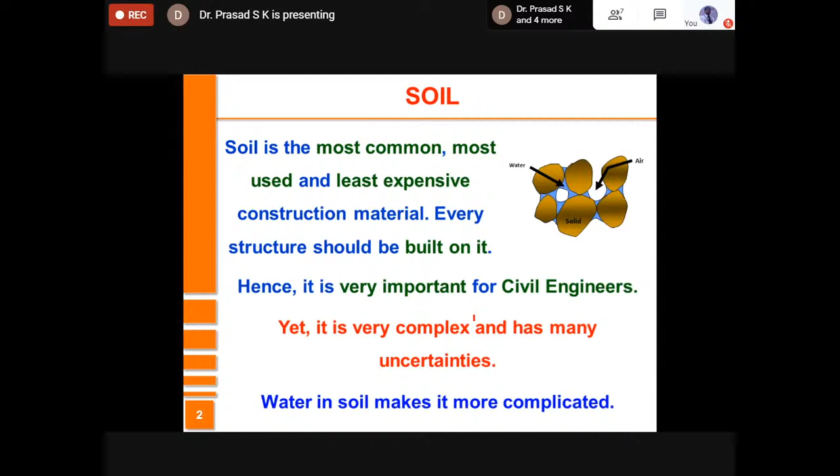Peculiarly, soil is not easy to handle. It has different properties at different places, and at the same place also its properties are very different at different times under different situations. So I always say it is a very complex construction material and hence poses a lot of uncertainties. In fact, the presence of water in soil makes it very, very complicated. Considering these complexities, there needs to be some standards, because due to the variations, things can go wrong if we are not considering things properly. Hence, Indian standards will have to play an important role. Unfortunately, I feel in geotechnical engineering it is not followed to a full extent, though we have many, many codes.

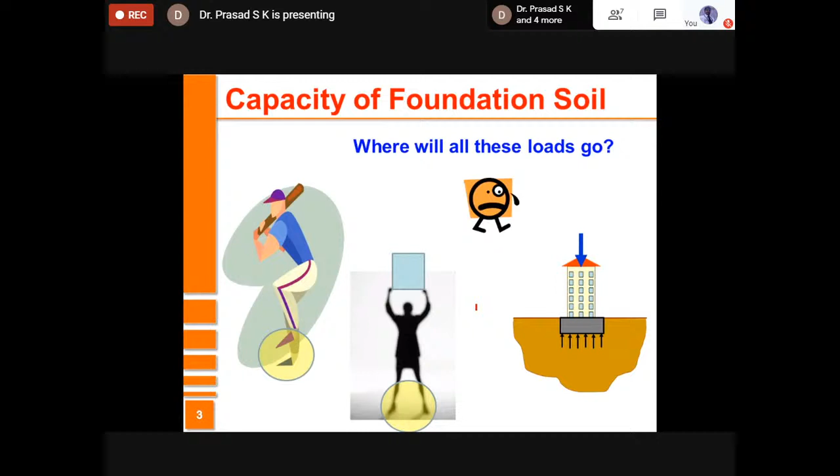I will not be listing all the codes in geotechnical engineering; my focus in this presentation is on only 3 codes. To start with, foundation is the most important geotechnical structure. Whatever load the structure carries, whatever forces and moments it carries, through the foundation it will have to transfer the stresses to the soil. So stresses will be greater than what they were before the structure is built. The question is whether the soil is capable of taking that stress. So we need knowledge about the capacity of the soil. That's why bearing capacity of soil plays an important role, and hence safe bearing capacity of soil is one of the most important parameters in the design of foundations.

Secondly, whenever you build any structure on soil, soil is a conglomeration of solid particles with a lot of void space in between them. That void space is filled with air or water or both. When you apply an additional load, there is every possibility that the soil particles may settle more, causing the settlement of the structure.

We can't allow settlement beyond limits. I always talk about these two classical cases. Mexico City, where you can expect a settlement of the order of 1 meter in 1 year because of the fat clay, soft clay. When you apply any load, there is a possibility of consolidation settlement causing huge settlement. And then the Leaning Tower of Pisa, famous for its differential settlement.

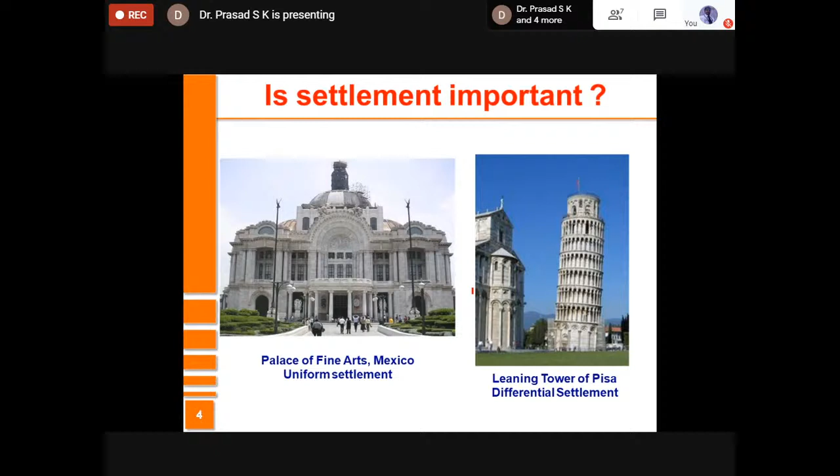So settlement should be kept under control. It should not exceed the limits. That's the other important objective we should know.

Then, as I said earlier, soil at different places is of different varieties, different qualities, and so on. So at the site, we should ensure that soil has certain characteristics, certain safe bearing capacity, its settlements are within whatever limits possible, and so on, for which tests are necessary.

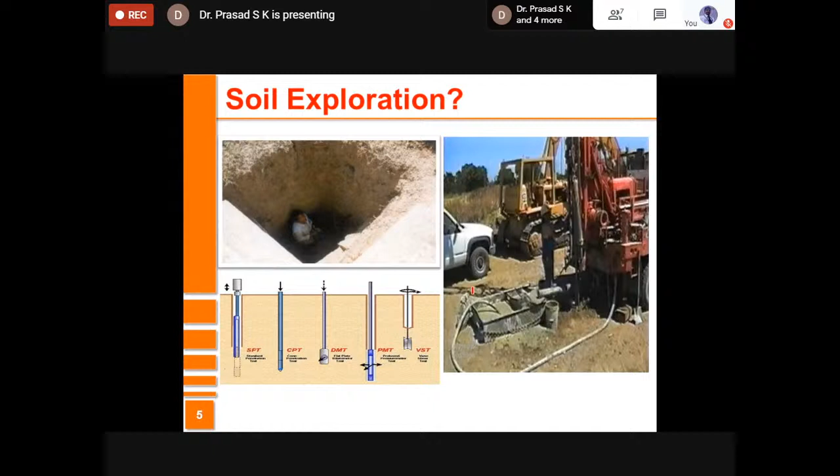The tests can be conducted in the field. Tests also can be conducted in the laboratory, and sometimes, depending on the importance of the structure, we will have the test conducted both in field and laboratory. In field tests, SPT, standard penetration test, plays a very important role.

Keeping all these in mind, I have decided today that I'll be talking about three codes. The first one is IS 6403, which talks about how the SBC of soil has to be computed. Please note that SBC is not a unique value. Sometimes vaguely we ask, what is the SBC of soil at this site? It is dependent on many, many factors, and that's what we are going to discuss as per IS 6403.

The second one is IS 1904, which talks about what factors to consider to determine the depth of foundation. Please note that depth of foundation is the depth from the ground surface to the bottom of the foundation. Only when you know the depth of foundation will you be in a position to decide the type of foundation.

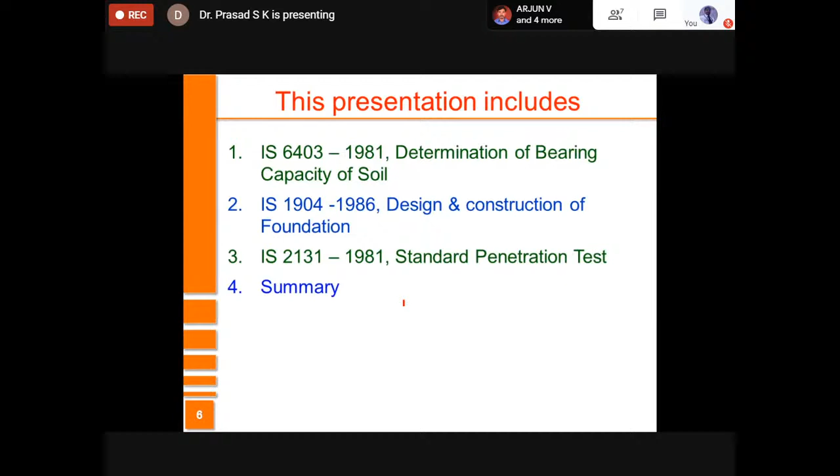In addition, you also have some details about settlement. What is the permissible settlement as per Indian standards? And lastly, we spend a little time on standard penetration test and some of the corrections suggested in IS 2131 with regard to the standard penetration number.

Well friends, I'm going to start on IS 6403, which is the Indian standard code for the determination of bearing capacity of soil. As I mentioned earlier, bearing capacity of soil depends on many factors. And this code covers factors such as mode of failure, effect of presence of groundwater table, effect of shape of the footing, depth of the footing, inclination of the load.

Eccentricity in load. It covers different types of soils, the two extremes, cohesive soils and cohesionless soils, and the determination of bearing capacity from two field tests, standard penetration test as well as standard static cone penetration test.

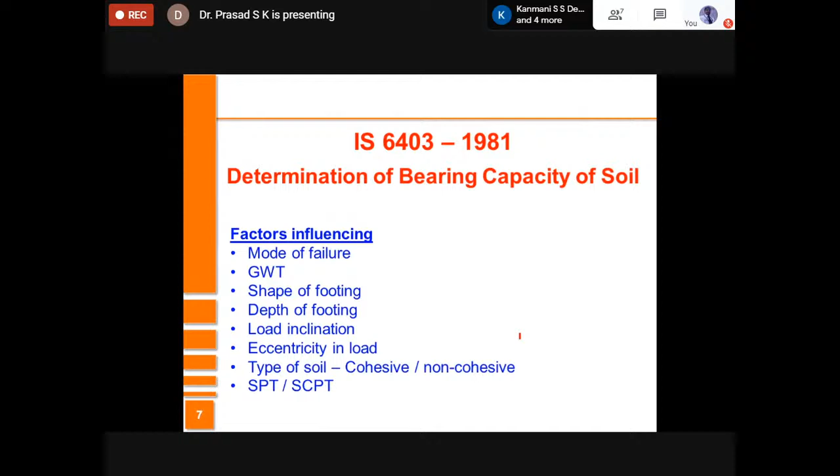Well, bearing capacity, as I mentioned earlier, structures do carry load. And all these loads, forces, moments which the structures carry will finally have to be transferred to the soil below. There is a foundation in between which actually transfers the structural load to the foundation soil. This soil should carry some strength, should have some capacity. If its capacity is low and we design a structure which carries much bigger stress, automatically we see failure.

One of the most classical failures I have presented here is the Transcona grain elevator. Way back, more than 100 years back, I think 1913, in Canada, this failed. The failure was purely due to bearing capacity failure. People had assessed the bearing capacity. At that time, there was not much geotechnical engineering known. Professor Terzaghi had not put forth his theory yet.

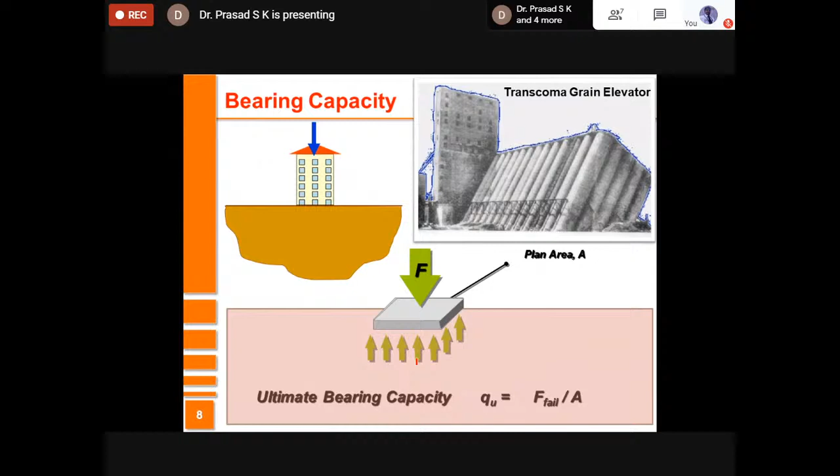And then it was loaded with the grains, so during the harvest, they had a good supply of grains, they started loading it. And once the stress increased beyond the capacity, it experienced general shear failure. Those of you who are interested can always have a look at it, lots of articles are there on that. What is important is to find out how much is the capacity of the soil here. The maximum capacity, we call it the ultimate bearing capacity.

So in IS 6403, these definitions are there. As I said, ultimate bearing capacity is the maximum capacity the soil below the foundation has before it experiences failure.

We also sometimes use net ultimate bearing capacity, symbolized as QD in IS code. If I consider this as the foundation, it is the foundation level at which I would like to know the capacity. At this place, before the structure is built, soil has some load, some overburden pressure. Net ultimate bearing capacity is that extra pressure beyond the initial pressure which the soil can take before it fails.

Then you have safe bearing capacity, which is the safe extra load the soil can take in addition to its own initial overburden pressure. Therefore, we always put a factor of safety. Suitably, a factor of safety of 3 is taken.

So SBC is very much used in the design of geotechnical structures. Also, allowable bearing capacity, as mentioned in IS code, sometimes called allowable bearing pressure, is more superior to safe bearing capacity. Safe bearing capacity talks only about shear failure, but there is also settlement.

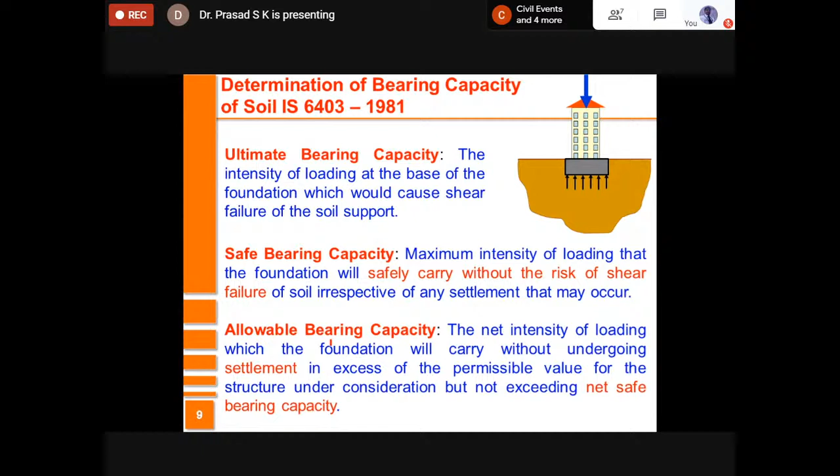Going directly into the bearing capacity equation, all of us know that bearing capacity was initially determined based on limit equilibrium theory, based on moment equilibrium, way back in the 1920s by Prandtl, and then in 1943 by Terzaghi, and several other researchers later on in the 80s, Meyerhof, Bala, and several people, gave these bearing capacity theories. This is a generalized bearing capacity theory as given in the Indian Standard Code.

QD here stands for net ultimate bearing capacity, which I explained earlier. And then it has 3 terms. The first term is basically the cohesion component. The second term is the surcharge component. And then the third term, which is the weight of the soil at the base of the foundation.

So the terminologies here are mentioned. I say that this is generalized because initially when Terzaghi and others gave the equation, they had not considered several other factors like shape factor, depth factor, and so on. But here, all these are considered. So here, C stands for unit cohesion of soil.

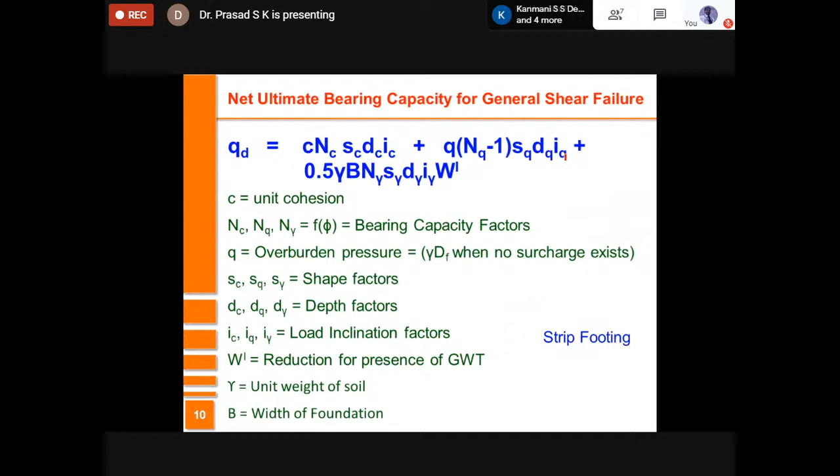And you need to know all these parameters to find out QD. You find out C, the cohesion of soil, phi, the angle of internal friction, gamma, unit weight of soil, from field tests, or maybe from samples collected in the laboratory and tests you do in the laboratory. So beforehand, you'll be knowing the values of C, gamma, and phi. And other things can be obtained from the formulae, which I'll be showing you.

NC, NQ, and N gamma, which are the bearing capacity factors, are obtained from this table as per IS 6403. But an equation is also available and a graph is also available. You can notice that with increase in phi, all these parameters increase. Therefore, bigger the strength of soil, bigger will be the values of NC, NQ, and N gamma.

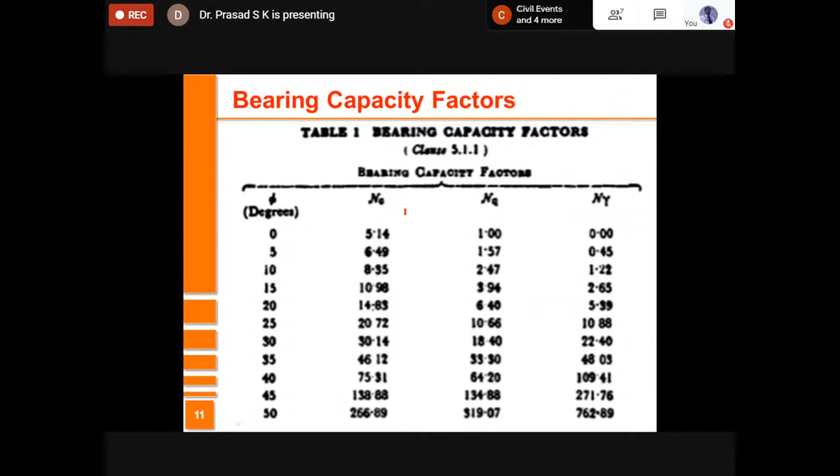Automatically, bigger will be the bearing capacity of soil. Here you are given NC, NQ, and N gamma at an interval of 5 degrees. So if the value at the site is anywhere in between, you are supposed to linearly interpolate. Using this data, you can find out, depending on the value of phi, NC, NQ, and N gamma at the site.

Then the shape factor is obtained from these formulae, which are again in this IS code. Normally you have a continuous strip footing, or you may have a rectangular, square, or circular footing. So you are going to apply these shape factors to the 3 terms of the bearing capacity equation as shown here.

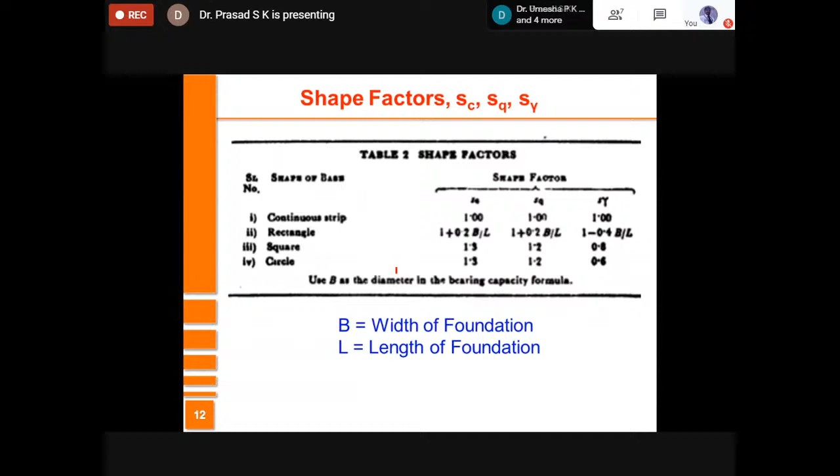If it is strip footing, shape factor is 1; square footing, 1.3; circular footing, 1.3 for SC. And if it is rectangle, then you need to know the dimensions of the footing. If it is a footing of size 2 meter by 3 meter, then SC is equal to 1 plus 0.2 into 2 by 3. Likewise, you find out SQ and S gamma. Here B happens to be the width of the footing and L happens to be the length of the footing.

Then depth factor. The depth factor is obtained from the formula given here. Please note that DC is equal to 1 plus this value. DQ and D gamma will be equal to 1 if the value of phi is less than or equal to 10 degrees. And if it is more, then DQ and D gamma are given by this formula.

What is there here? DF happens to be the depth of the foundation. As I told earlier, it is the depth from the ground level to the bottom of the foundation. And B is the width of foundation. N phi is given by this formula, tan square of 45 plus phi by 2.

Using these values, you can find DC, DQ and D gamma. Please note that DQ and D gamma are the same, but their values will have to be obtained based on the value of phi. If phi is less than or equal to 10 degrees, you use this formula, and simply DQ and D gamma are 1. If phi is greater, then their effect in depth and hence in bearing capacity will be more, and hence you have an equation like this.

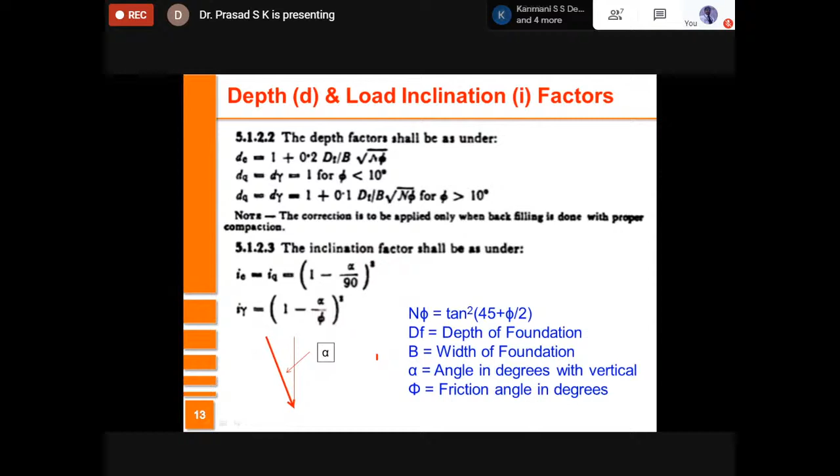Similarly, I gamma is also given by this equation, where alpha is that angle with which the load is inclined to vertical and phi is the angle of internal friction. So we have covered now effect of shape, effect of depth, and then effect of load inclination.

Then you have water table. The groundwater table will be fluctuating. At some places, groundwater table may be near the surface, at some places it may be at great depth, and at some places it may be somewhere in between. What Indian Standard Code says is that you have to apply the effect of the presence of groundwater table in the third term, and this term has the coefficient W dash. The value of W dash is said to range from 0.5 minimum to 1.

The details are given here, and I'm going to explain them. Case A, when value of W dash is 1. Case 2 or B, when value of W dash is 0.5. And case C, when value of W dash is anywhere in between 0.5 and 1.

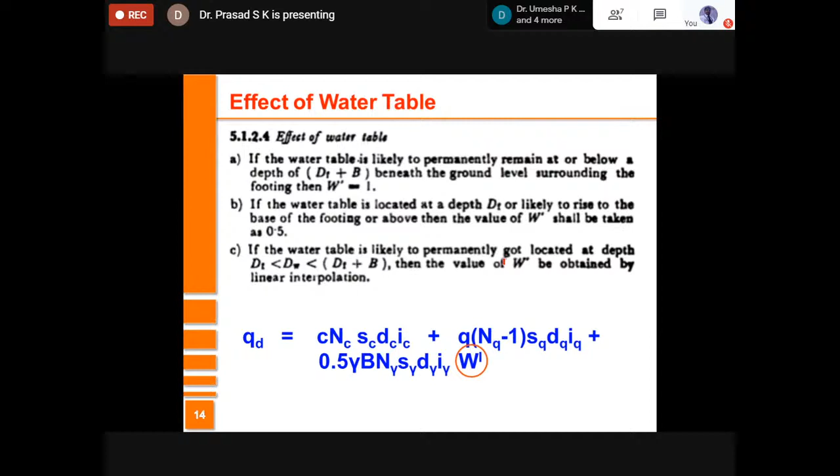You need to consider these variations to be linearly interpolatable, so you linearly interpolate between 0.5 and 1. Basically, the effect of the presence of groundwater table is varied from the base of the foundation till a depth below the base of the foundation, which is equal to the width of foundation. This is the influence zone for W dash.

As I said earlier, W dash varies from 0.5 to 1. It is 0.5 when the groundwater table is either at the base of the foundation or above the base of the foundation. It is equal to 1 when the groundwater table is beyond this level, which is a distance equal to width of the foundation from the base. If it is anywhere beyond this, it is 1, meaning there is no interference of groundwater table.

When the groundwater table is in between the base of the foundation and a depth equal to B, width of foundation, from the base, you have to linearly interpolate using a simple formula. ZW indicates the depth of the groundwater table from the base of foundation.

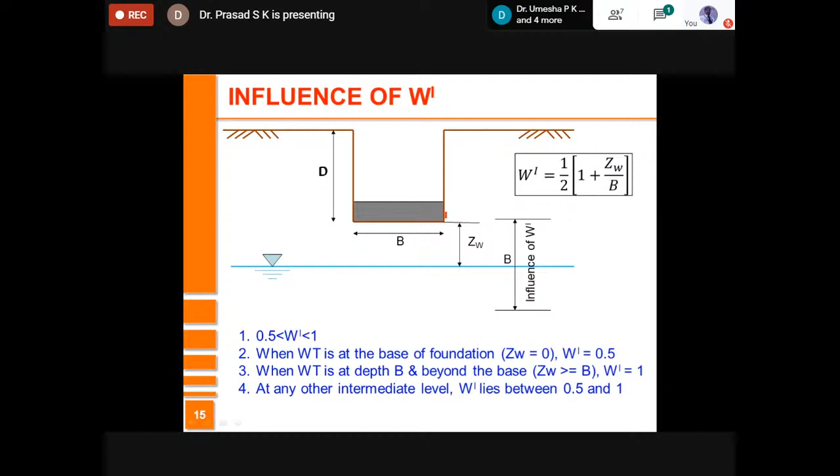If you are investigating at a site, you find out when the groundwater table will be at its highest level. You'll have to either find out from local people, or perhaps search for a shallow well and identify it. This requires some experience, so you should find out where you expect the groundwater table to be. If it is at great depth, you don't have to worry, but during rainy season, if it is likely to rise closer to the foundation, you need to account for this.

As I said, case A is when the groundwater table is at great depth. What do I mean by great depth? From the base of the foundation, it is at a much lower level than a distance B, the width of foundation, from the base. In this case, there is no interference of groundwater table, and hence W dash is equal to 1.

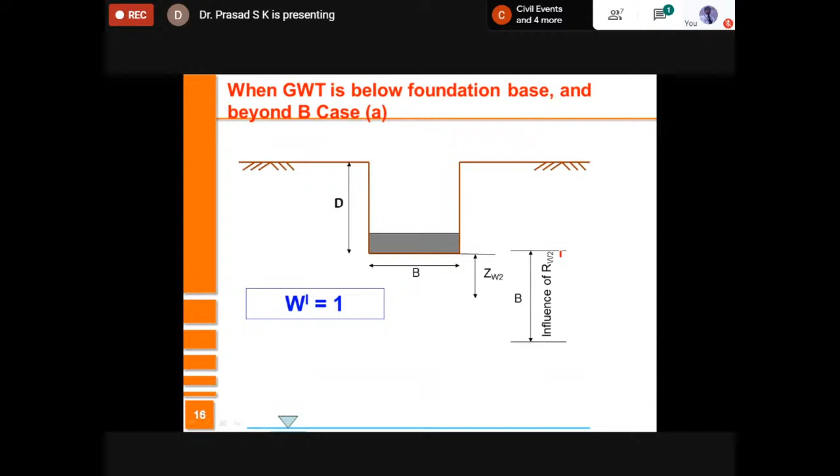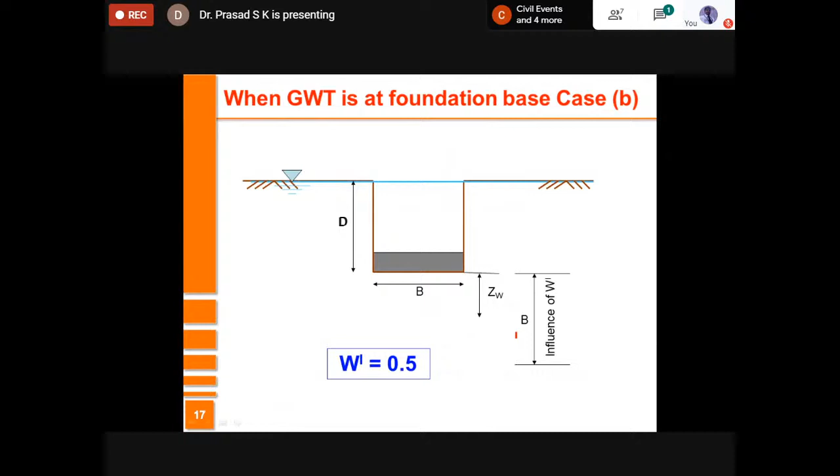I mentioned RW2 is actually the influence of W dash. Case B is when the groundwater table is at the base of the foundation or above. In all these cases, the value of W dash has to be 0.5, meaning the third term in the bearing capacity equation will reduce to half.

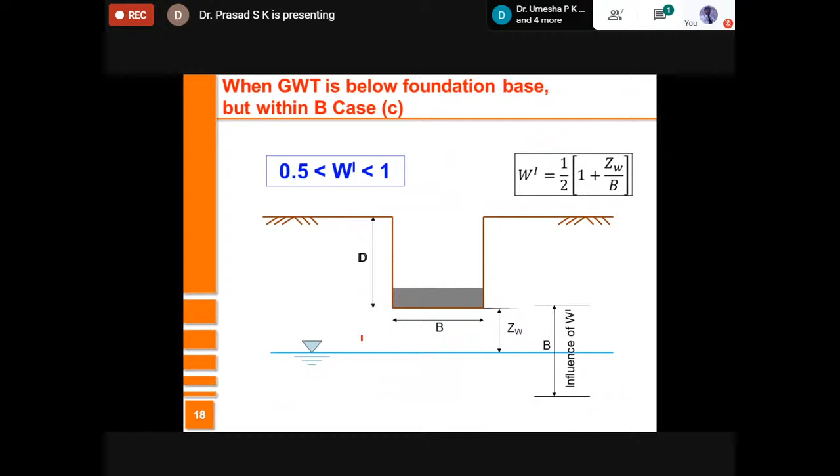Then there is the case in which the groundwater table is from the base of the foundation till a depth equal to width of foundation from the base. In that case, you measure ZW and substitute it along with B into the equation. If ZW is 0, W dash equals 0.5. If ZW is B, W dash equals 1. Anywhere in between, it's a linear interpolation, so it ranges from 0.5 to 1.

Next, I take you on to mode of failure. Depending on the kind of soil and soil properties, whether it is stiff, dense, or soft, loose, the failure is going to be different. Three modes of failure have been identified: general shear failure in dense soil, stiff clays or rocks; local or punching shear failure in very loose soil, loose cohesionless soils, or soft clay; and local shear failure, which is in between the two extremes.

In general shear failure, there will be hardly any displacement. You keep applying the load, and at one point it will have a catastrophic failure with no warning. When it fails, the footing simply rotates, exactly what happened in the classical example I showed, the Transcona grain elevator in Canada. Once the footing rotates, you can see bulging on one side. In the load settlement curve, as the load increases, the settlement increases marginally, and at one point you see a peak, after which failure is continuous.

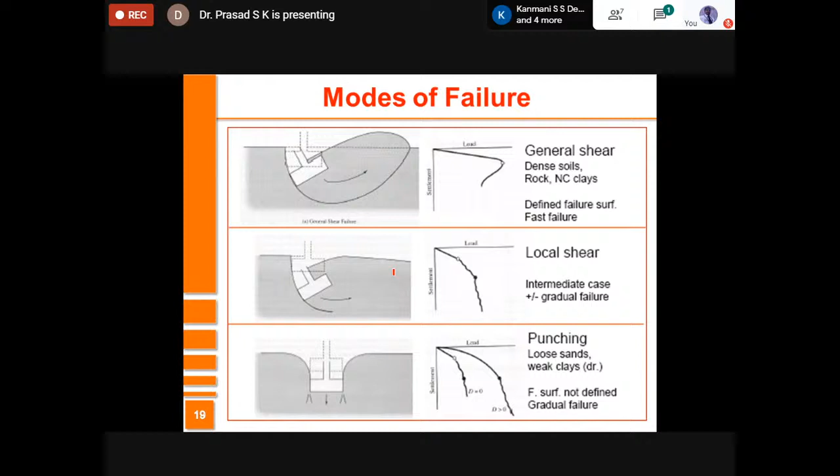In punching shear failure, on the other hand, you will hardly see any failure. The soil is very loose and the footing keeps going down, experiencing large settlement. There is no peak at all in the load settlement curve; settlement continues as time proceeds. You will never see any bulging on the sides of the foundation, and the settlement will be enormous compared to the first case. Local shear failure is in between the two, and I have put the distinctions between general and punching shear failure here.

Local shear failure comes in between. As I said earlier, in stiff soils having phi equal to 36 degrees and above, SPT-N value very high, relative density very high, and cohesive soil having very good cohesion, that is stiff soil, you see general shear failure. On the other hand, punching shear failure is found in soils with phi equal to 28 degrees, SPT-N value very low, 0 to 5, relative density very low, 20%, and also undrained cohesion very low, value of 50 kilopascal.

We can go through all these distinctions. What the IS code says is that if the soil has phi equal to or greater than 36 degrees, it experiences general shear failure. And if the soil has phi equal to or less than 28 degrees, it experiences local or punching shear failure. Anywhere in between 28 and 36 degrees, it is not known. It could be any of them, so it's called mixed shear zone or an intermediate zone. In that range we are not sure whether it is local or punching shear failure.

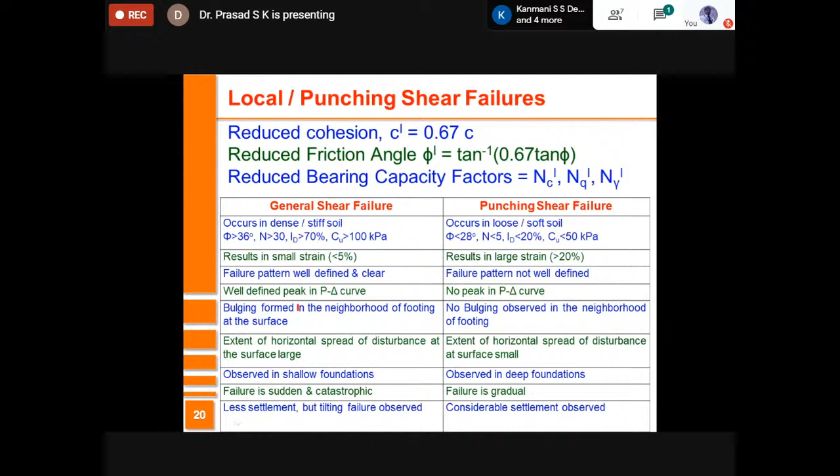The other factor considered is load being eccentric. So eccentricity of load comes into picture in the third term of the equation, where B is there. Instead of B, you use effective B, but for all calculations the length also may be effective length. You need to consider the eccentricity in the other direction also. Hence, the area which you consider is not the actual area of the footing, but the effective area of the footing. Therefore, the effect of eccentricity of loading is to drastically reduce the bearing capacity of soil.

Just a little briefing on eccentricity of loading. The equations shown earlier are derived considering that the footing is concentric, meaning the CG of the load coincides with the centroid of the area of the foundation, and hence the pressure at the base is uniform. On the other hand, there is every possibility that the resultant might shift from the centroidal position. If it shifts like this, automatically the footing is eccentrically loaded, the pressure is more on this side and less on the other side, and that's what causes differential settlement also.

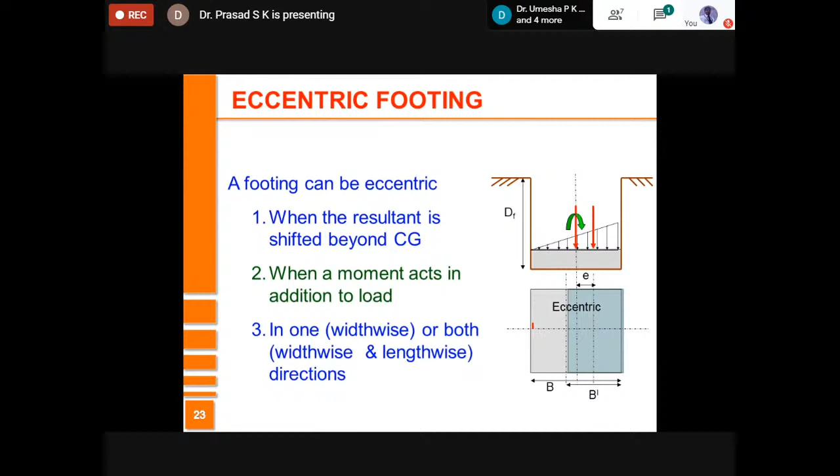So this is the amount of eccentricity E. When you have the eccentricity E like this, the CG, which was actually supposed to be here without the moment, without the eccentricity, gets shifted towards here. So now this is the CG point. What the IS code says is that instead of taking the full width, you take this much width, where this is the center line of this new width. So new width is B dash, and B dash is simply equal to B minus 2 times E.

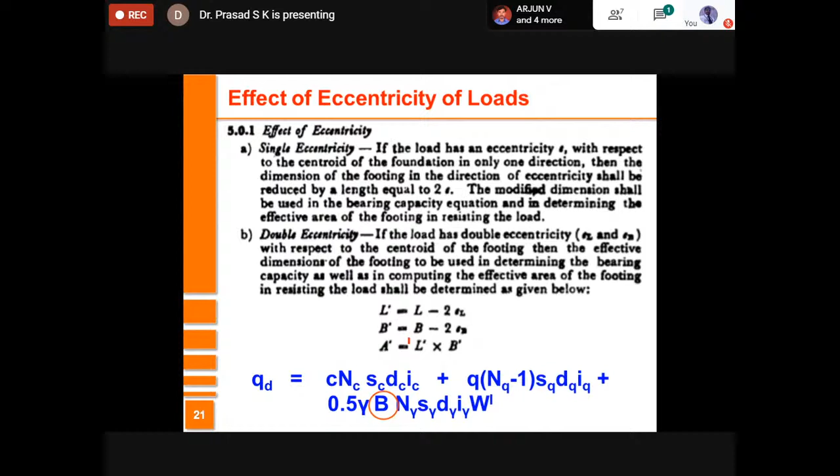That is exactly what is given here. L dash is equal to L minus 2 times E in that length direction, and B dash is equal to B minus 2 times E in the width direction. So this is how you will take B dash. So instead of considering the varying load, you consider that over this area the load is uniform.

So this is E in the direction of the width, you can call it EB also. So this is 2 times EB. Therefore, B dash is equal to B minus 2 times EB.

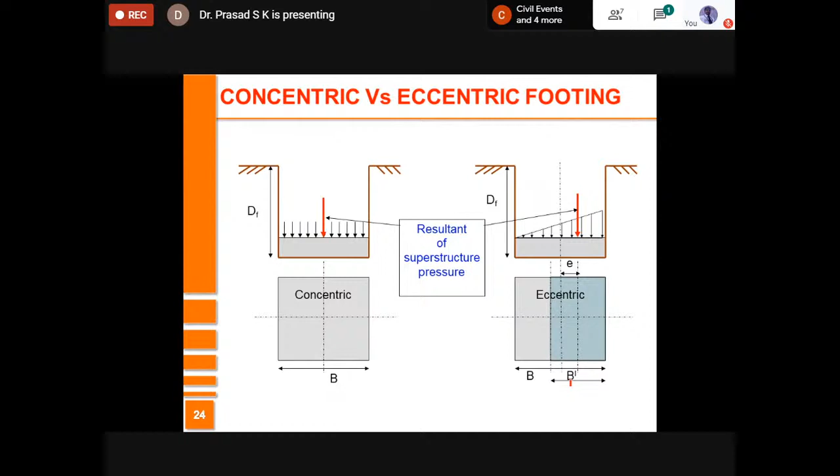This is L dash and this is B dash. So B dash is equal to B minus 2 times EB, instead of EX you can call it EB or EX also. And L dash is equal to L minus 2 times EY.

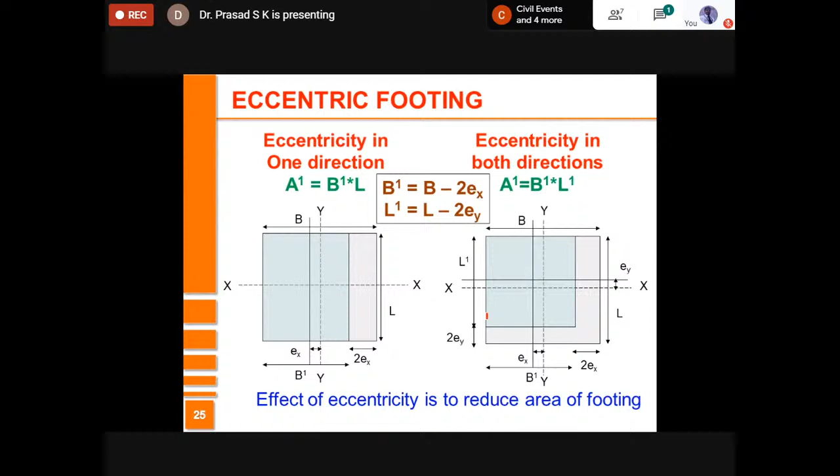Okay friends, I quickly move on to the other things. If you have two extreme cases, cohesionless soil is one thing, or cohesive soil. Cohesionless soil will have C equal to 0. All granular soils come under this. Based on relative density, you can say whether the failure is general shear failure, local shear failure, or anywhere in between. When the density of the ground is very high, it is general shear failure. When it's very low, it is local or punching shear failure. In between, you have to interpolate.

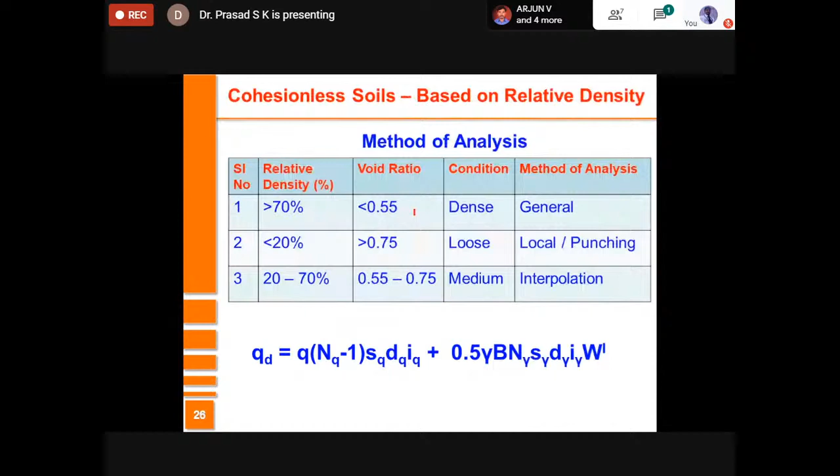You can also mention this with respect to void ratio, and then with respect to SPT N value. You can always conduct the SPT test and put the corrected N value from the top till whatever depth you want. The depth we normally consider is about 1.5 to 2 times B below the base of the foundation, and you normally have the vertical spacing of SPT N value about 0.5 to 1 meter, usually 0.75 meter.

When you have data like this, you take the average value below the base of the foundation, that's what IS says. While doing so, sometimes in between you might get one very huge N value, which may be due to a mistake - there may be a small pebble offering resistance, so you don't know. In case that one exceptional N value is much more than 1.5 times the average, you discard that and take the average of the rest.

So I've just shown here, if N is, let us say, 10, 12, 14, 16, 18, take the average. If you have N values like this, 10, 12, some intermediate value, very high 40, 16, 18, remove that high value and take the average of the rest.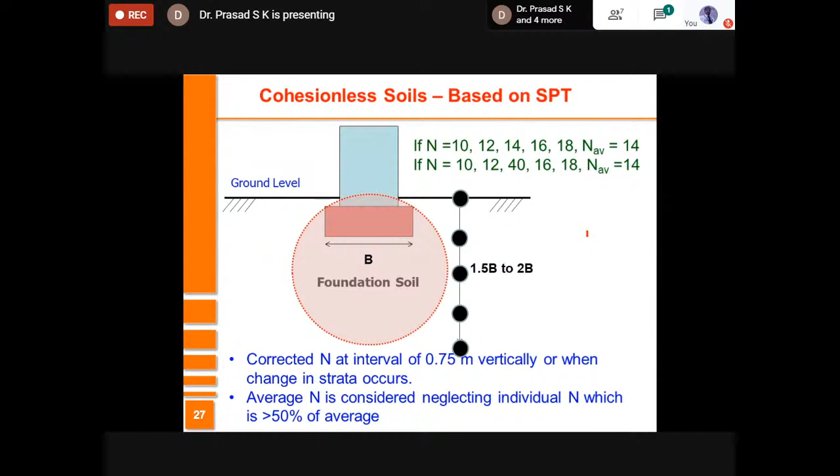That's what you do. Once you take the SPT N value, IS code says it can be correlated with the friction angle of the soil. So you can use this graph, and if SPT N value is, let us say, 30, then the corresponding friction angle phi is equal to 36 degrees. So from SPT you find out phi, and use that phi in the calculation of the bearing capacity equation.

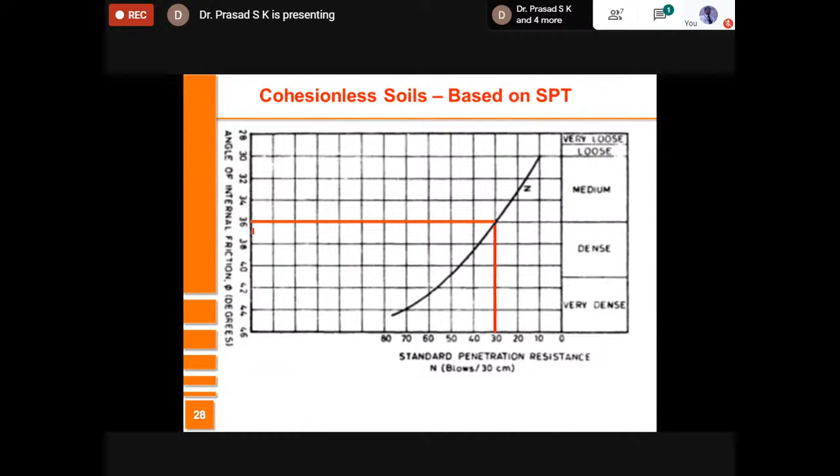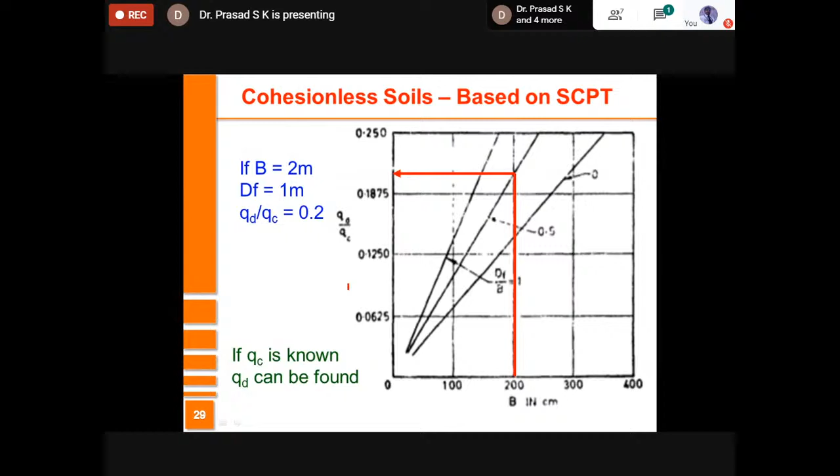Or you also can use SCPT results - the point resistance QC you get from the static cone penetration test. Let us say this is the table given in the IS code. If B is equal to 2 meters, depth of foundation is 1 meter, then for DF by B equal to 0.5, if the width is 200 centimeters or 2 meters, the corresponding ratio of QD by QC is this value, say 0.2. You know QC from the SCPT test, so knowing QC you will be able to find QD, which is the net ultimate bearing capacity of soil. So you can use SCPT results also.

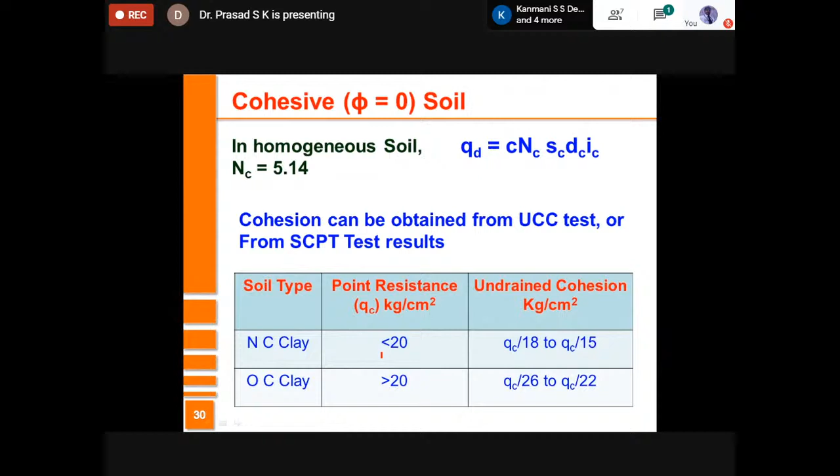This is for purely cohesive soil, phi equal to 0 soil, clayey soil. The equation for QD will have only the first term, the second and third terms will vanish, and NC can be taken as 5.14. You can find out C from the unconfined compression test, or you can use SCPT results to find the undrained cohesion, approximate value ranging from QC by 18 to QC by 15, when QC is less than 20 kg per centimeter square. And then you have also the other situation.

If this thickness is very small, mostly the affecting soil will be the one with C2. And there are chances that C1 is greater than C2 also. So you always have to take this into account. That's why, if required, you can take a 2-layered soil approach.

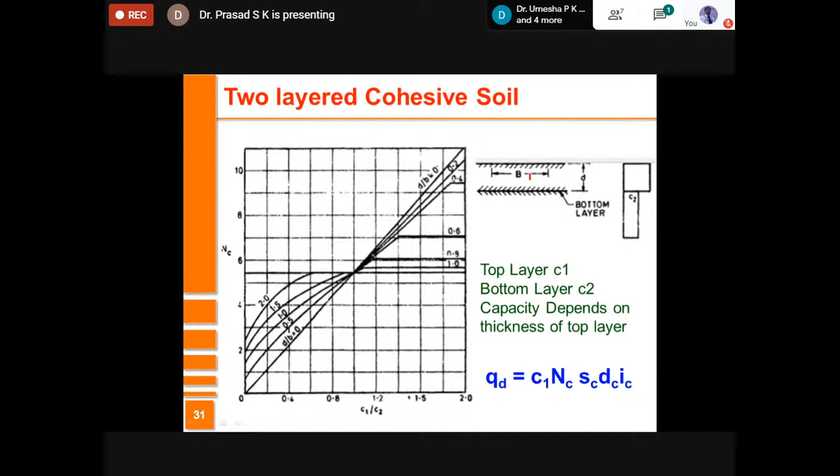So I'm going a little slow, therefore I'll be slightly quicker from now onwards.

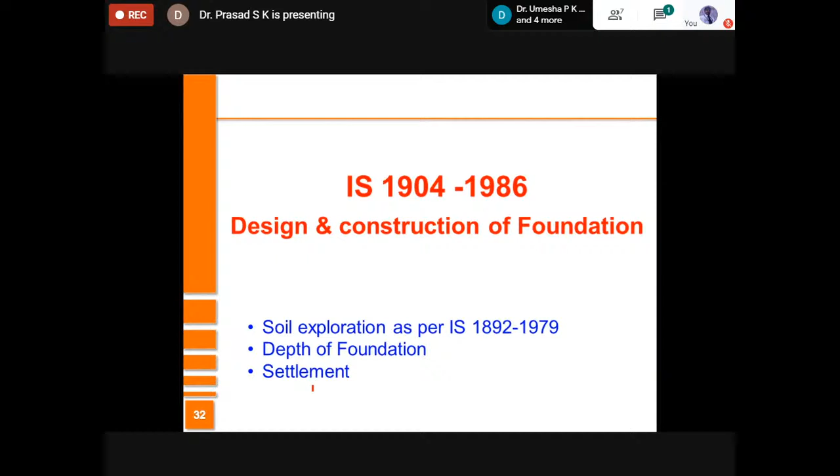I take you on to the next code, IS 1904, which basically talks about soil exploration, though it is given in greater detail in IS 1892. It talks about the factors influencing depth of foundation, and also the permissible value of settlement.

Site investigation is very, very essential. I always keep saying that it is extremely important. Unfortunately, in India, we don't do a very good job of it.

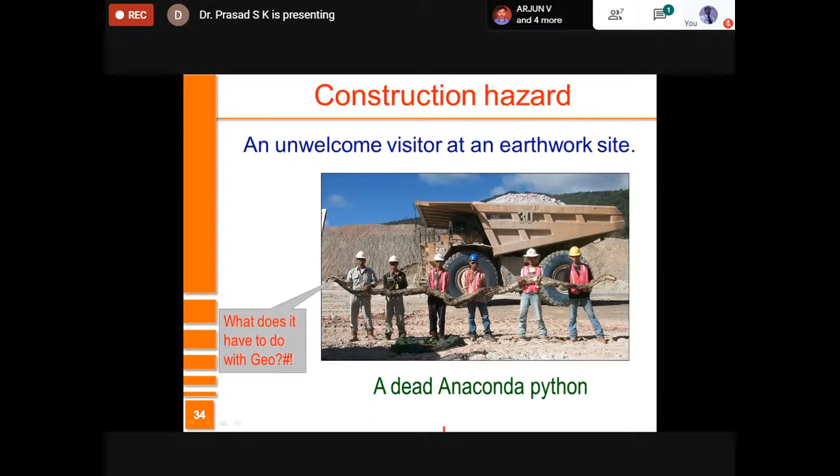So here, these geotechnical engineers were doing site exploration, digging, and unfortunately for them, they found a Python. Well, fortunately for them actually, they found it this way. What I want to mention here is that unless you go deep and see, you will not know what is there below. And our job is to find out what is there below, so site investigation is very, very important.

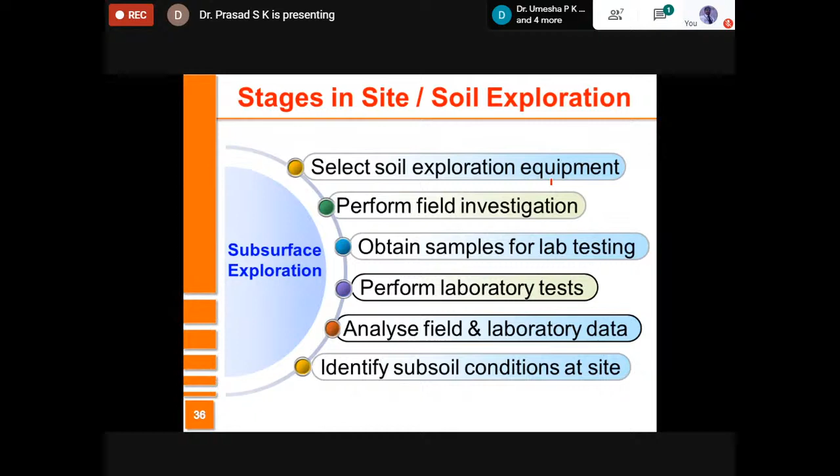And you do that with tests in the field, by collecting samples and doing tests in the laboratory. All of these are important.

So what do you do here? You determine several parameters like soil basic properties, index properties, the level of the groundwater table, strength parameters, and settlement parameters. You use them to classify the soil, decide the depth of foundation, find SBC of the soil, suggest ground improvement techniques if required, or even suggest the type of foundation.

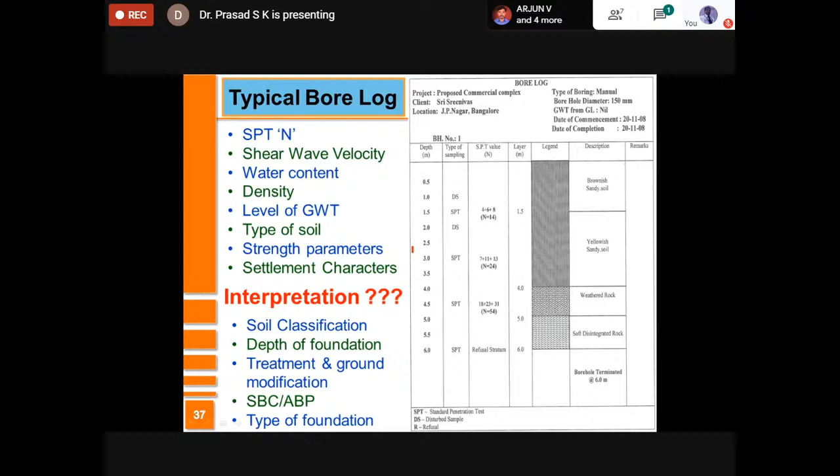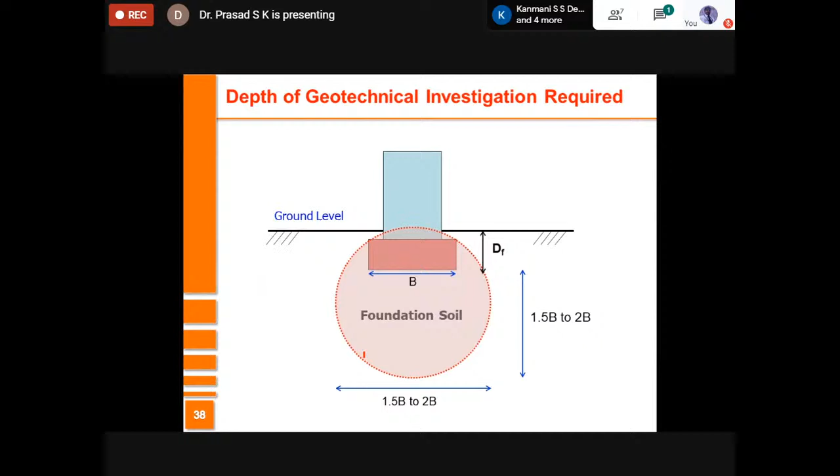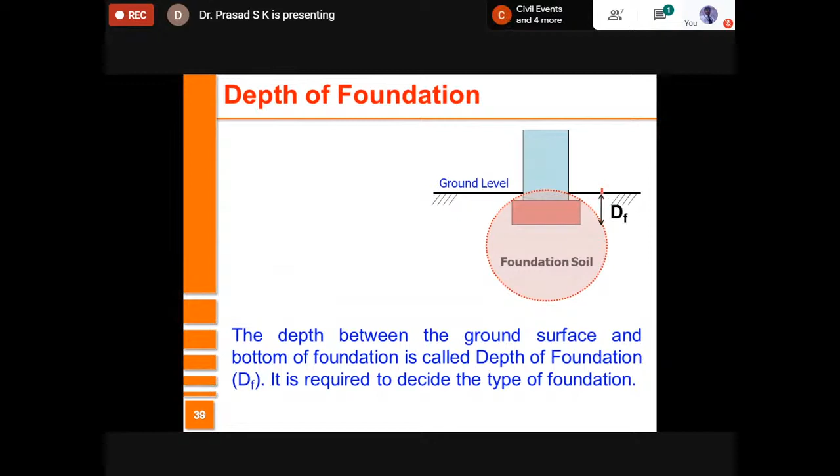Depth of foundation, as I earlier said, is the level till the bottom of the foundation. A lot of factors influence the depth of foundation - I can actually spend hours talking about each of them. So you go to that depth at which bearing capacity is adequate.

Go to that depth where there are no seasonal moisture changes, especially in case of BC soil. In cold countries, you go to that depth where there is no effect of freeze-thaw condition. Near the surface, there will be an effect of freeze-thaw conditions depending on the temperature, but as you go deeper, that effect reduces. You go to that depth.

Similarly, in an area where it is waterlogged or where there is a river, you go to that depth where there is no effect of scour, and IS says the minimum depth required is 500 millimeters. And you go to that depth where tree roots do not pose problems, and burrowing animals like snakes, ants, mice don't cause problems.

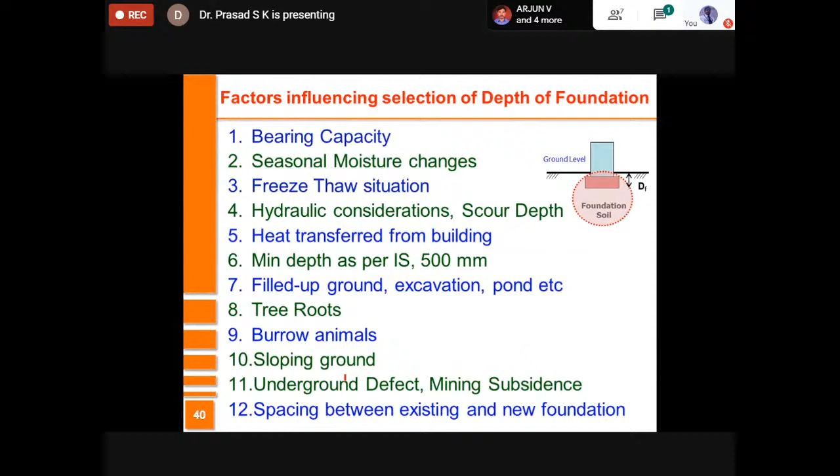With sloping ground, you have to be careful. When you have adjacent structures, you have to be careful. If there is some underground defect, maybe caused due to mining subsidence, you have to be careful.

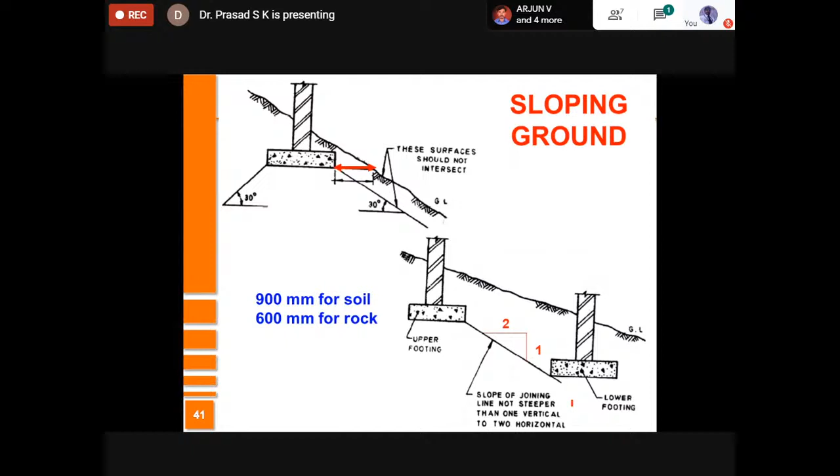So if you have a sloping ground, the edge of the footing should have some minimum distance from the edge of the slope - for rocks, 600 mm, for soil, 900 mm. And then, when you plot this, the slope should not be steeper than 2:1.

And then, when you have two neighboring footings, the spacing between them should be large. If the spacing is not large, there is every possibility of overlap. You're not supposed to put a footing like this with overlap - in that case, you need to go in for a combined footing. So the spacing you have to think of, it should be large.

How large? IS says X should be minimum, equal to the maximum of B1, which may be the width of the existing foundation, and B2, which may be the width of the new foundation. So X, the spacing, should be at least that maximum value.

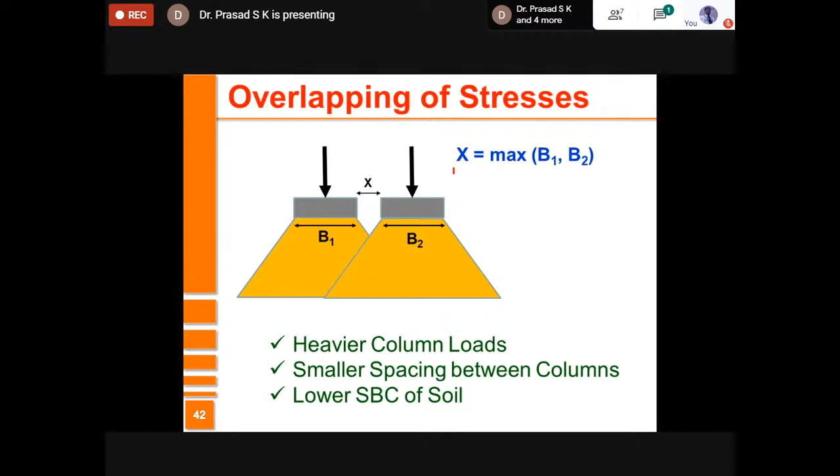If not, you have to go in for the combined footing. Then there is a mention on loads also.

Loads can be vertical or horizontal along with moments. Normally you consider dead load and live load as one case, or dead load, live load, plus either wind or earthquake load. And when the magnitude of wind or earthquake load is less, you neglect that.

Whenever the wind or earthquake load is less than 25% of dead and live load, you neglect their effect. If not, you consider their effect. When you consider their effect, you need to increase the SBC by 25%.

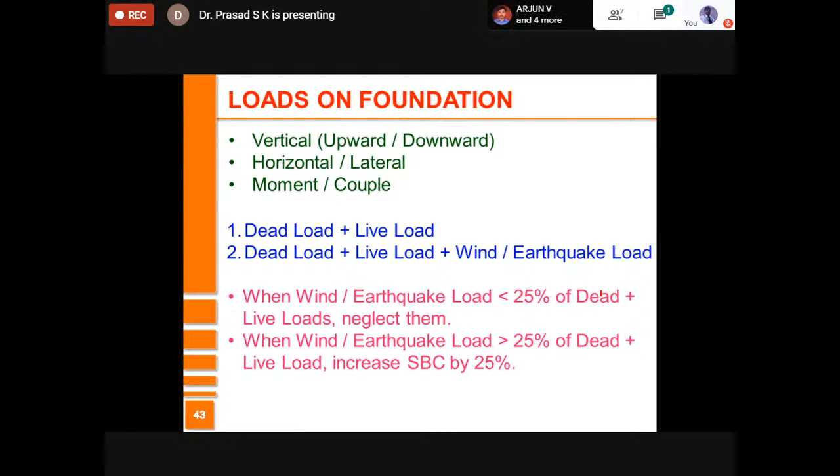So you have got SBC as 200 kilonewton per meter square. If you are taking the wind effect and/or earthquake effect, instead of 200, you take it as 250 kilonewton per meter square. So these are the mentioned factors of safety for sliding stability here.

When you consider both earthquake load and wind load, in addition to dead load, live load, and earth pressure, it should be 1.5 or more. And when you consider without the wind load and earthquake load, it should be 1.75 or more.

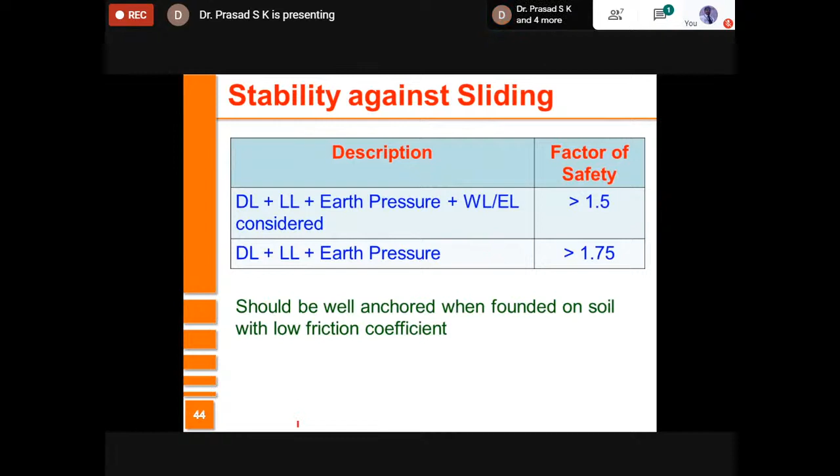In general, in a soil which has low friction, you should always think of anchoring it well. Stability against overturning should be 1.5 or more when you consider dead load, live load, earth pressure, along with wind and earthquake load. Or 2.

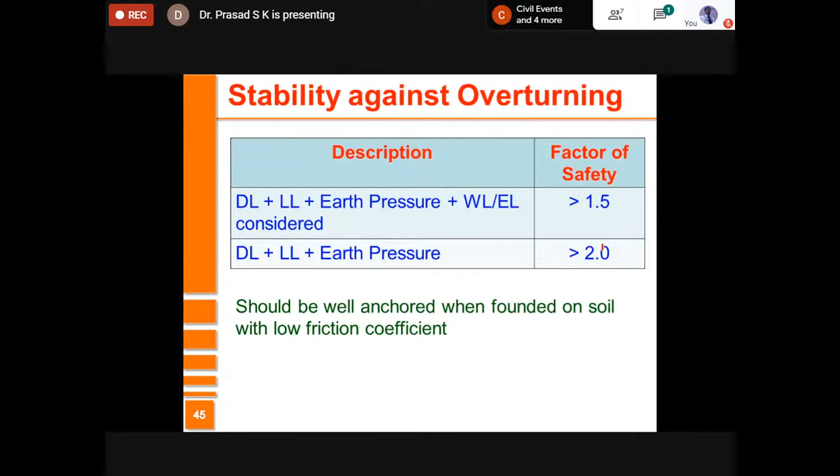Settlement has 2 important types: uniform settlement and differential settlement. This settlement happens because the soil, like compressible soil, experiences downward movement, and hence the structure also moves down. If the structure moves down uniformly, it is uniform settlement. If one portion of the structure moves more compared to the other, it is differential settlement.

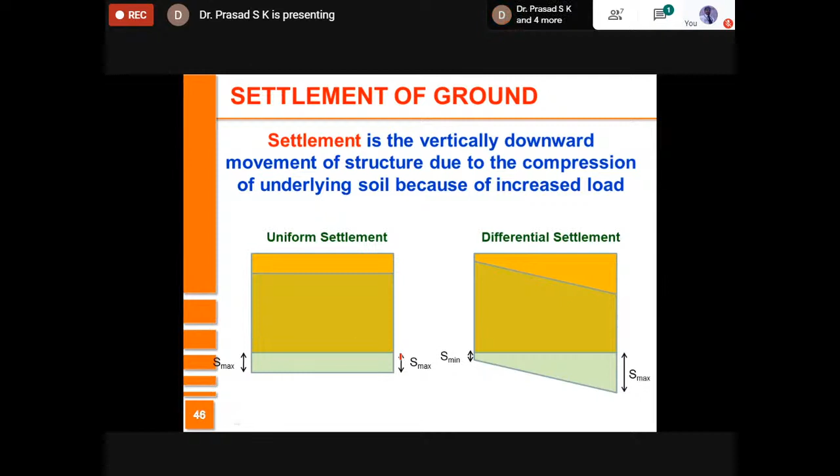So this is S max when it is uniform; S max is the same at both places. Otherwise, S max and S min. So maximum settlement is simply S max. Differential settlement is S max minus S min.

We also use angular distortion, that is S max minus S min over whatever length. If this is the length L, it's divided by L. So this is what Table 1 gives the values for. Please note, number 1 is for isolated footing, 2 is for raft foundations.

There are 2 extreme types of soils. For isolated footing, one is sandy soil or stiff clay, and another is plastic clay. Similarly, for raft foundation, sandy soil or stiff clay, and another is plastic clay.

Different types of structures: steel structure, RCC structure, and multi-story structure with RC structure or steel structure, in which you have panel walls or load-bearing walls. You also have water retaining structures, water towers, and silos. For all these, the permissible values are given.

So maximum settlement in millimeter, you can see here 50, like this. Differential settlement is given in terms of 0.0033L. If L is 10 meters, this is 0.033 meter or 33 millimeter. So S max minus S min should be less than 33 millimeter.

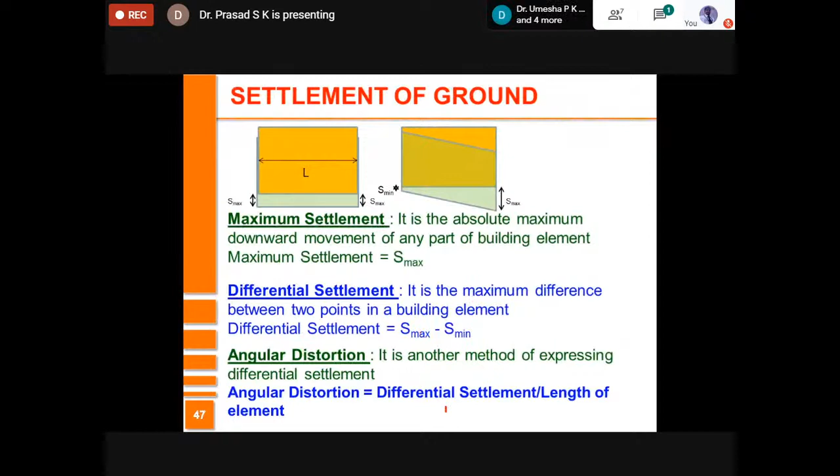Or it can be given in terms of angular distortion, 1 over 300. So S max minus S min, whatever value is there, divided by L should be equal to this 1 over 300. So these are given.

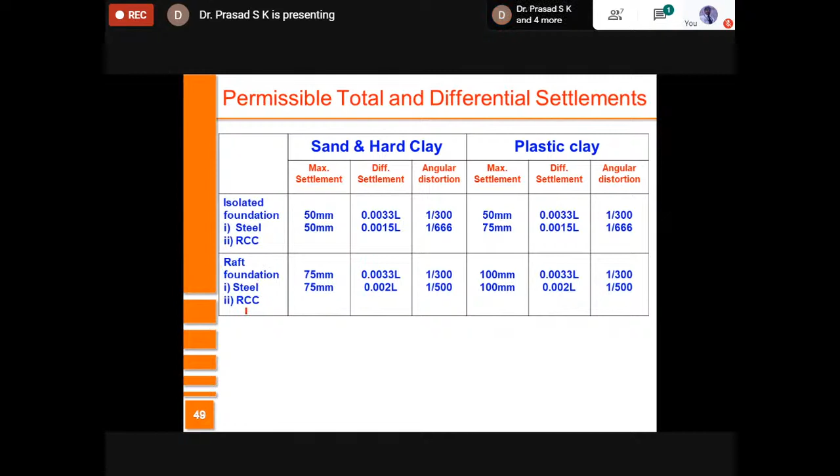I just mentioned here also, same thing repeated: for raft foundation, isolated footing, sand and stiff clay, plastic soil. Similarly, for raft foundation also given, both for steel and RCC structures I have mentioned here.

Lastly, I go to IS 2131. IS 2131 talks about the standard penetration test. So standard penetration test is a field test, very convenient test. But unfortunately, in India in particular, it is abused.

We simply find SPT N value, which is not standard. Each one of us have our own method of doing things in spite of the regulations. So strictly we need to follow IS 2131. And today we have more automated ones. We have to be careful.

So what do you do here? You simply try to find the penetration resistance of the ground at any depth. For that you have a split spoon sampler, and that is penetrated into the ground, for which you apply a loading energy. You apply the load through a standard hammer of 65 kgs, dropped from a height of about 750 millimeters, and find out how many blows are required.

This is for penetration by 30 centimeters or 300 millimeters beyond the seating drive. Initially, 150 millimeters we call the seating drive, and we allow that 150 millimeters without recording the number of blows required. Beyond that 150 millimeters, how many blows are required to penetrate by 300 millimeters is recorded as observed N value, observed SPT N. So it's a mere integer. In very soft soil, sometimes N can be 0.

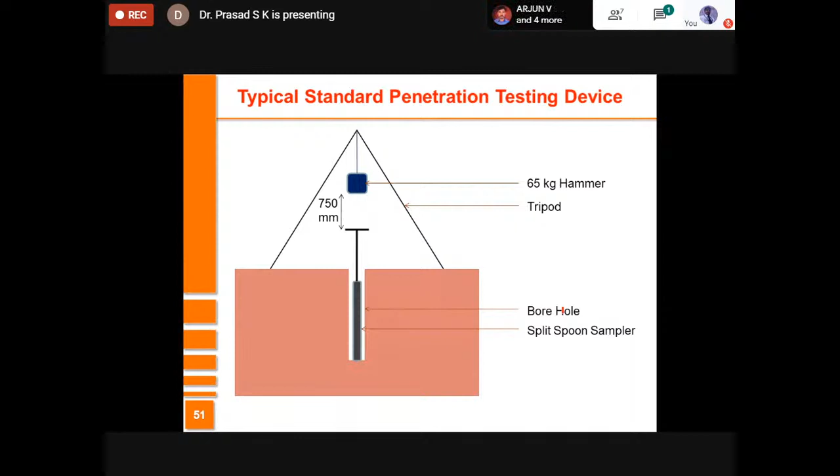You don't need to apply any hammer load; it automatically penetrates soft soil. So you require a split spoon sampler, hammer, tripod, drill rod, pulley, and some lifting devices, and an anvil or head for dropping the height, and dropping the hammer.

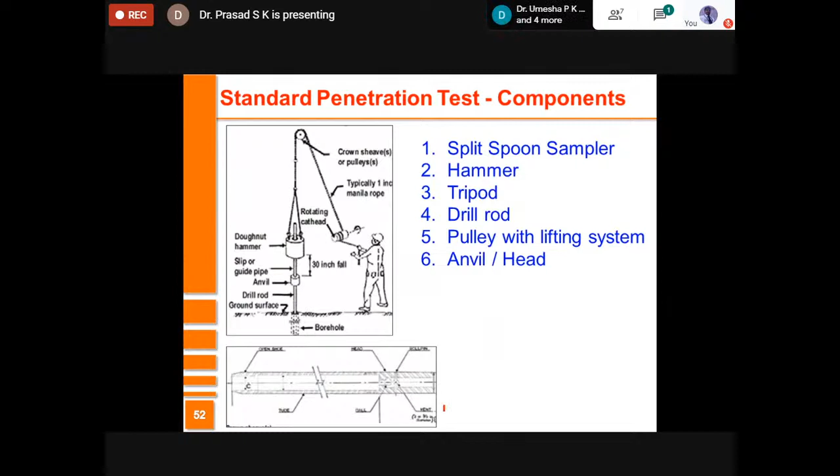So these are all the components of the split spoon SPT test, standard penetration test. This is the split spoon sampler, and you can split it into two parts. You penetrate this into the ground, and when you penetrate, the soil gets collected here. You can actually take the soil, and it can be used to some extent as an undisturbed sample also. It has a diameter of 38 millimeters, so it can directly be used in triaxial or unconfined compression tests. So we should carefully take out the soil.

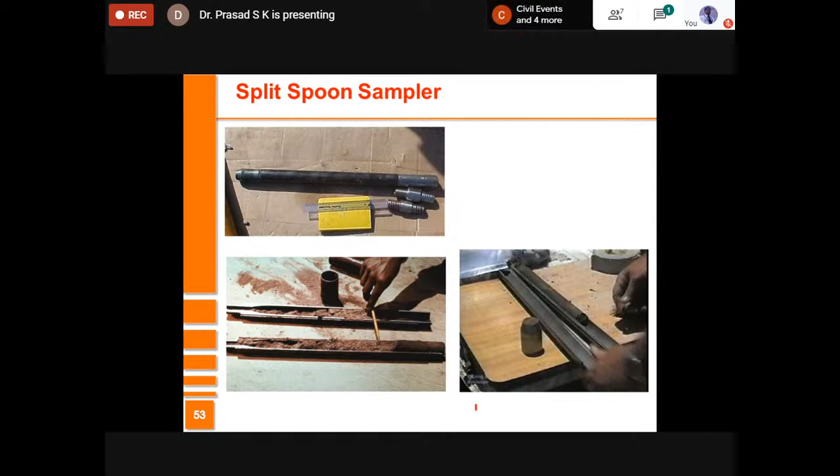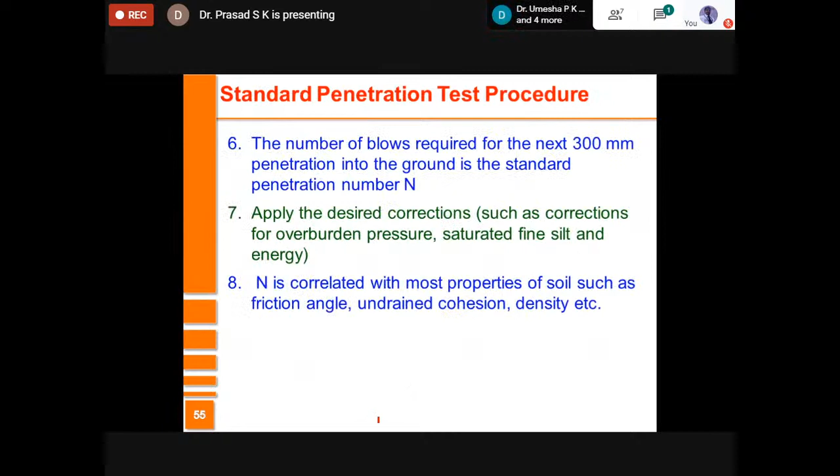In addition, you would find out the SPT N value. The procedure I have mentioned here, I'm going to skip. The advantage of the SPT test is that you don't require anything directly in the field. You do the test, and today you can do it mostly automated, and you can go to great depths also, 5, 10, 20 meters and so on.

The vertical spacing is about 0.5 to 0.75 meter, at which you get the readings. In addition, at those depths, you can collect soil samples also, so you can do certain other tests in the laboratory on those samples and see whether there is consistency between what you found in the field and in the laboratory. This SPT value is the observed N value.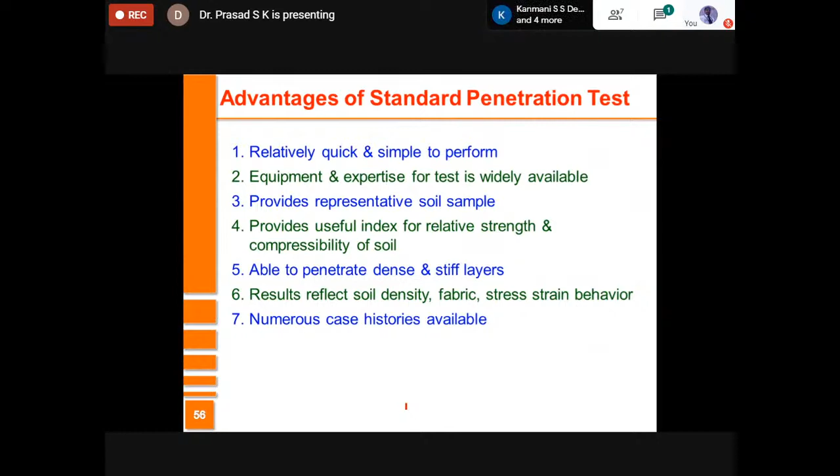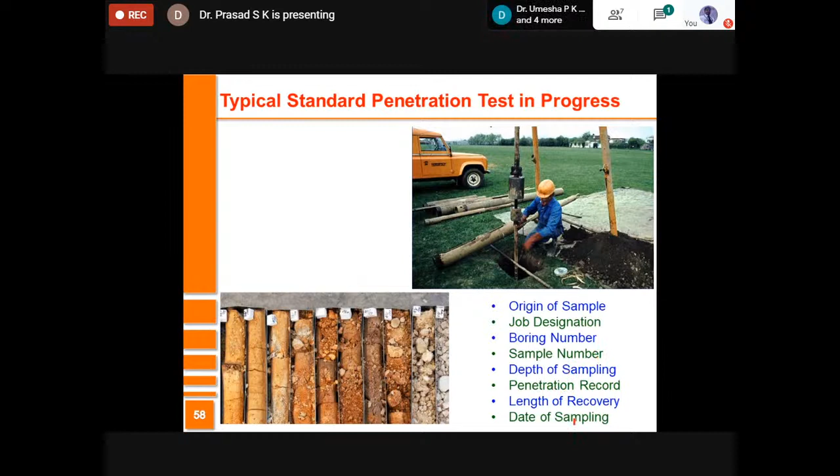The 2 corrections mentioned are: dilatancy correction, applicable in saturated fine silty sand. If the fine silty sand is very dense, then interestingly, the observed N value will be much more than the actual value. That is because the water present in the voids has that negative pressure, and hence a correction like this is applied.

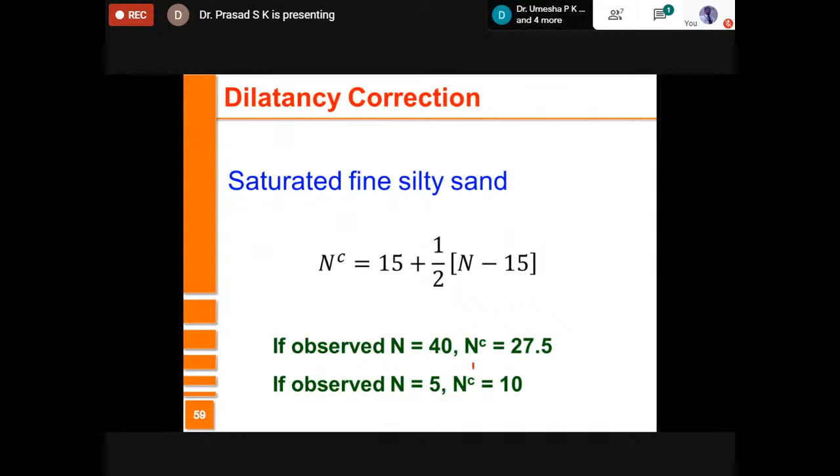On the other hand, if it is in a loose state, under dynamic load there is a possibility of nearly liquefaction happening, wherein excess pore water pressure is developed. Because of this excess pore water pressure, the correct actual strength will be much more than the observed strength. So this correction has to be applied.

The other correction is the overburden correction. In geotechnical engineering, overburden plays an important role. Soil at the surface behaves very differently from soil at some depth below. At depth, soil is confined in all directions, therefore it's much stiffer. So overburden pressure correction is applied like this.

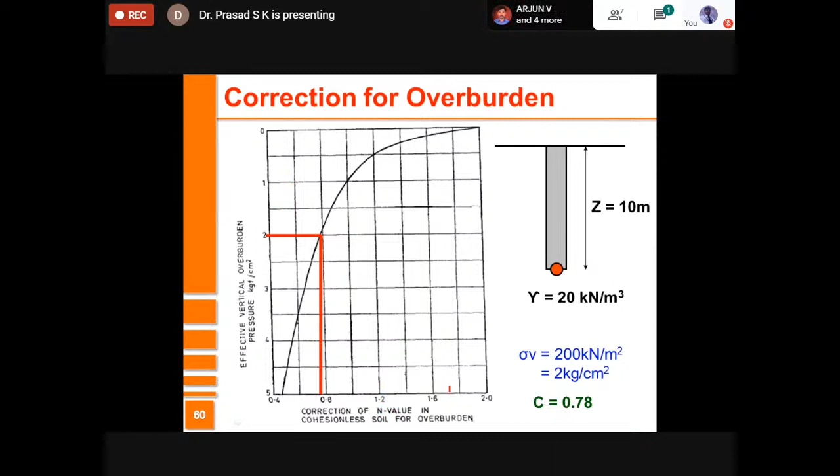On the other hand, if near the surface it is not confined, it shows less resistance, then the N correction value you need to apply will be much more than 1. So this is the overburden correction.

Again concluding or stressing that soil is a complex construction material. I always try to say that it is a smart material, an intelligent material. So if you abuse it, it naturally gets angry, and it shows its anger in the form of a failure. Properties of soil vary enormously from place to place, time to time, and so on.

Therefore, you have to be extremely careful in handling the soil. Water always is the major culprit in geotechnical engineering. If there were no water in soil, you wouldn't have geotechnical engineering at all. Every soil would have been good enough to hold any structure, but water is the one which poses challenge, and we have to treat it with care.

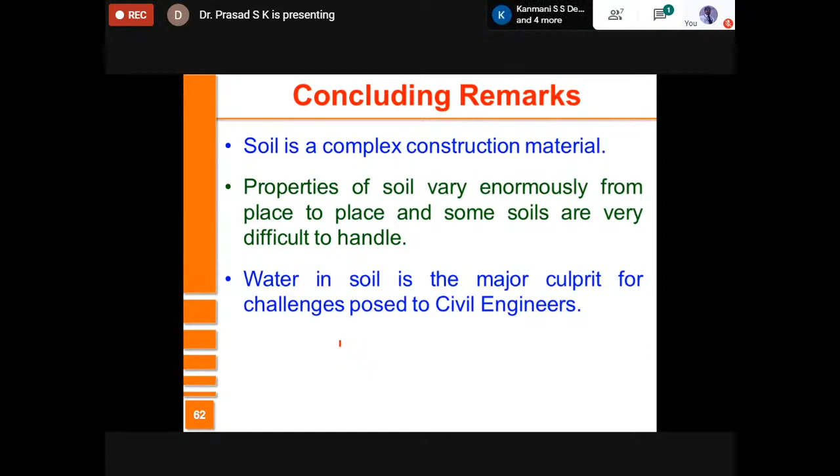So with this, I'd like to mention that today I covered 3 IS codes. The first one was IS 6403, according to which the bearing capacity equation can be determined for the soil, and hence you find the SBC of soil, considering several factors like the groundwater table, eccentric loading, depth of foundation, inclination of load, shape of the foundation, mode of failure, and so on, both for cohesive as well as cohesionless soil.

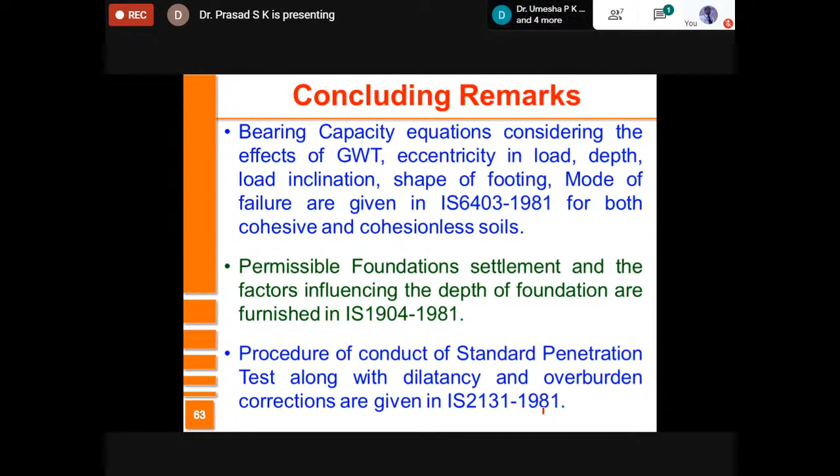Then I talked about IS 1904, wherein the permissible foundation settlement is given, in addition to the factors considering the depth of foundation. Lastly, briefly, I discussed SPT, the standard penetration test, the test procedure, and then the 2 corrections: correction for dilatancy and correction for overburden pressure, as given in IS 2131.

Today, geotechnical engineering is there to stay. It has grown enormously, and it still has a lot of growth possible. We have a lot of activities happening above the ground. I'm sure we'll have more and more activities happening below the ground. I won't be surprised tomorrow if we have a city built below the ground. You have activities like foundations, tunnels, soil exploration, retaining walls. So geotechnical engineering is very much valuable for the infrastructure of tomorrow.